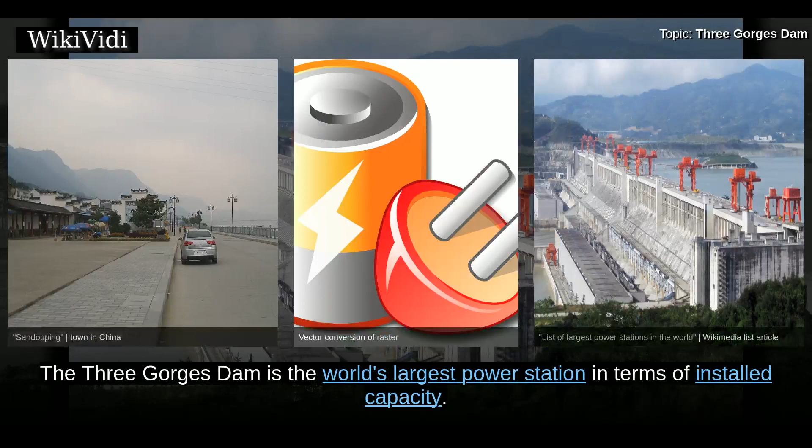Three Gorges Dam. The Three Gorges Dam is a hydroelectric gravity dam that spans the Yangtze River by the town of Sandouping, located in Yiling District, Yichang, Hubei Province, China. The Three Gorges Dam is the world's largest power station in terms of installed capacity.

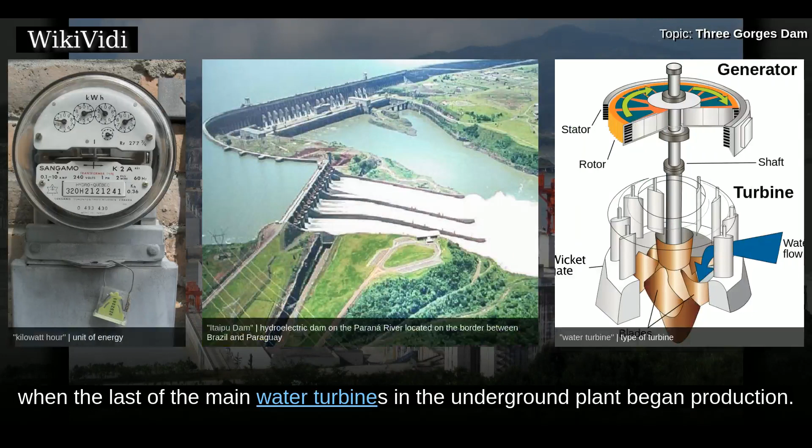In 2014, the dam generated 98.8 terawatt-hours and had the world record, but was surpassed by Itaipú Dam that set the new world record in 2016, producing 103.1 terawatt-hours. Except for the locks, the dam project was completed and fully functional as of July 4, 2012, when the last of the main water turbines in the underground plant began production. The ship lift was complete in December 2015.

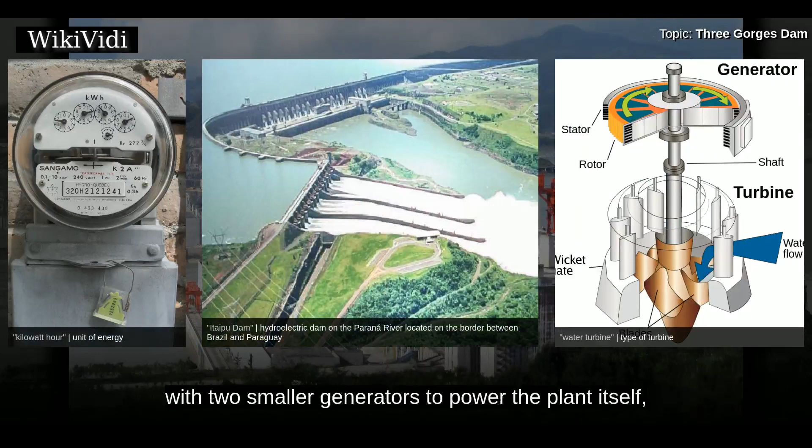Each main water turbine has a capacity of 700 megawatts. The dam body was completed in 2006, coupling the dam's 32 main turbines with two smaller generators to power the plant itself. The total electric generating capacity of the dam is 22,500 megawatts.

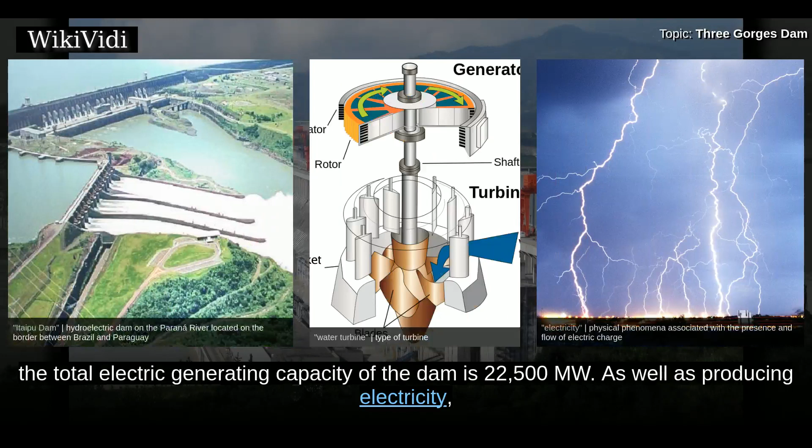As well as producing electricity, the dam is intended to increase the Yangtze River's shipping capacity and reduce the potential for floods downstream by providing flood storage space. China regards the project as monumental as well as a success socially and economically, with the design of state-of-the-art large turbines, and a move toward limiting greenhouse gas emissions.

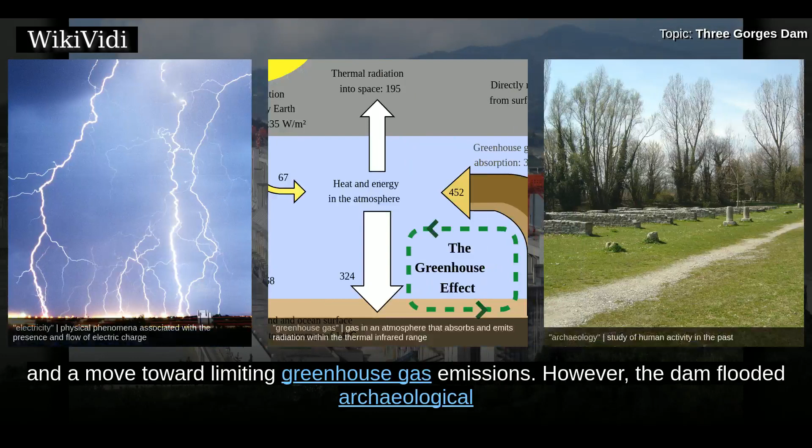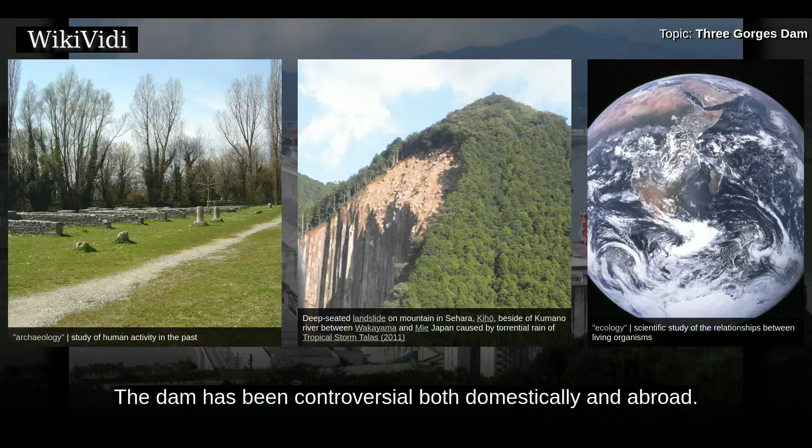However, the dam flooded archaeological and cultural sites and displaced some 1.3 million people, and is causing significant ecological changes, including an increased risk of landslides. The dam has been controversial both domestically and abroad.

History. A large dam across the Yangtze River was originally envisioned by Sun Yat-sen in the International Development of China in 1919. He stated that a dam capable of generating 30 million horsepower was possible downstream of the Three Gorges. In 1932, the nationalist government led by Chiang Kai-shek began preliminary work on plans in the Three Gorges. In 1939, Japanese military forces occupied Yichang and surveyed the area. A design, the Otani Plan, was completed for the dam in anticipation of a Japanese victory over China.

In 1944, the United States Bureau of Reclamation chief design engineer John L. Savage surveyed the area and drew up a dam proposal for the Yangtze River project. Some 54 Chinese engineers went to the U.S. for training. The original plans called for the dam to employ a unique method for moving ships. The ships would move into locks located at the lower and upper ends of the dam, and then cranes with cables would move the ships from one lock to the next. In the case of smaller watercraft, groups of craft would be lifted together for efficiency.

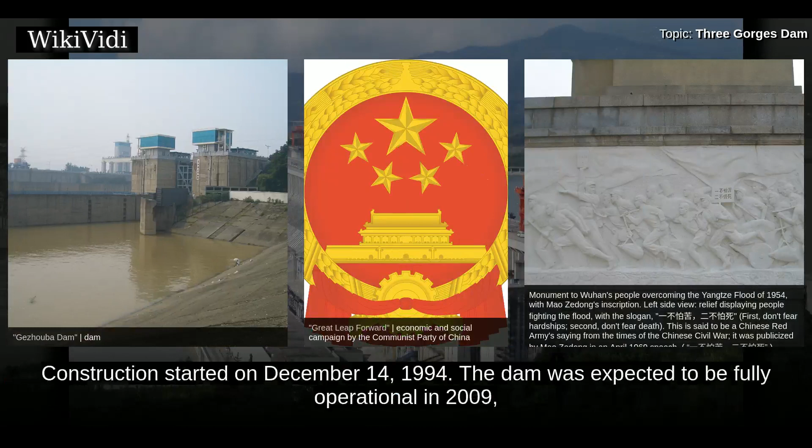The National People's Congress approved the dam in 1992. Out of 2,633 delegates, 1,767 voted in favor, 177 voted against, 664 abstained, and 25 members did not vote. Construction started on December 14, 1994. The dam was expected to be fully operational in 2009, but additional projects such as the underground power plant with 6 additional generators delayed full operation until May 2012. The shiplift was completed in 2015.

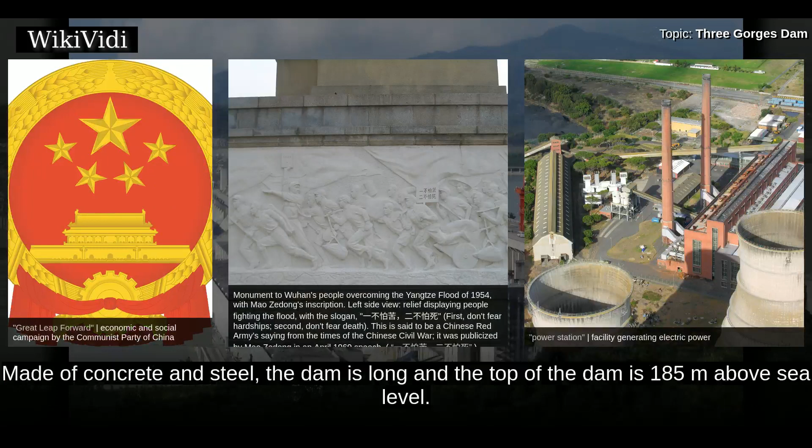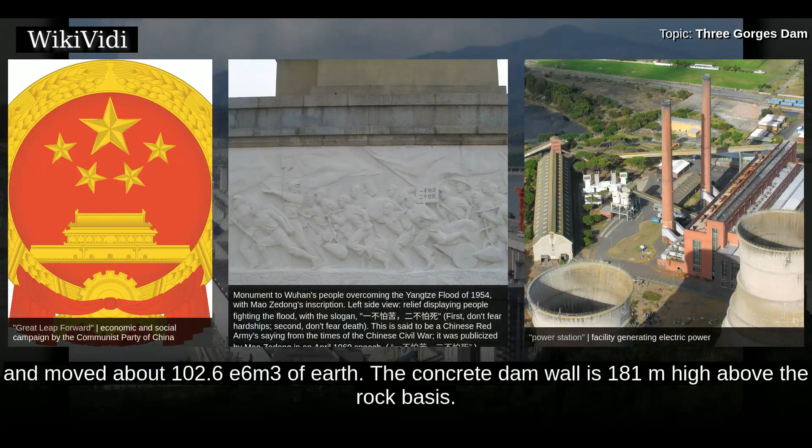The dam had raised the water level in the reservoir to above sea level by the end of 2008, and the designed maximum level by October 2010. Composition and dimensions. Made of concrete and steel, the dam is long and the top of the dam is 185 meters above sea level. The project used 27.2 million cubic meters of concrete, used 463,000 tonnes of steel, and moved about 102.6 million cubic meters of earth. The concrete dam wall is 181 meters high above the rock basis.

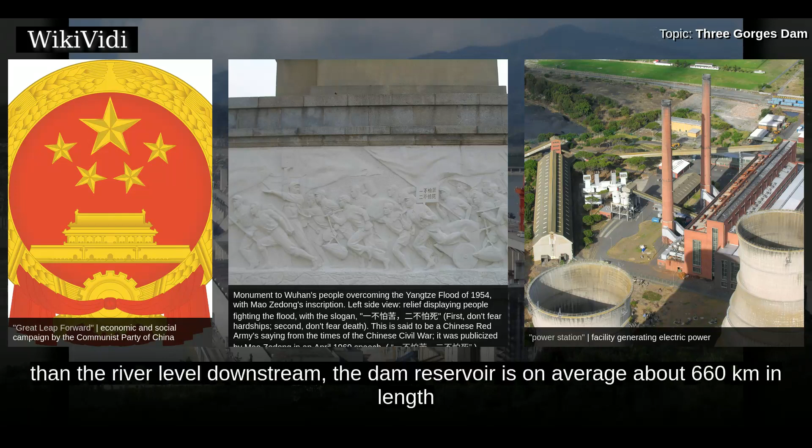When the water level is at its maximum of 175 meters above sea level, 110 meters higher than the river level downstream, the dam reservoir is on average about 660 kilometers in length and 1.12 kilometers in width. It contains 39.3 cubic kilometers of water and has a total surface area of 1,045 square kilometers. On completion, the reservoir flooded a total area of 632 square kilometers of land compared to the 1,350 square kilometers of reservoir created by the Itaipú Dam.

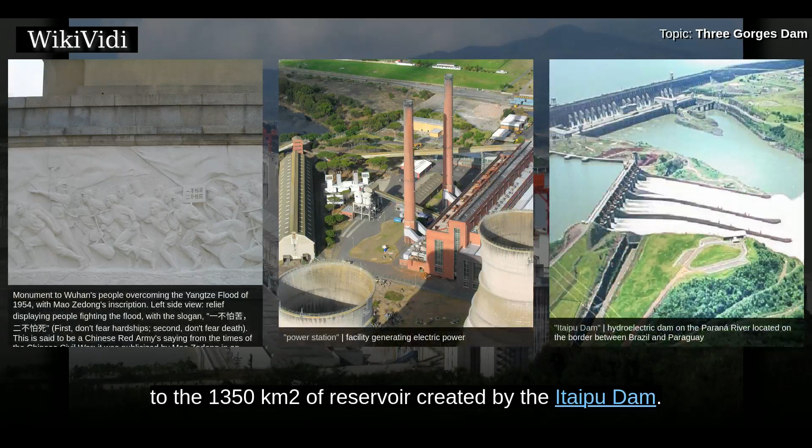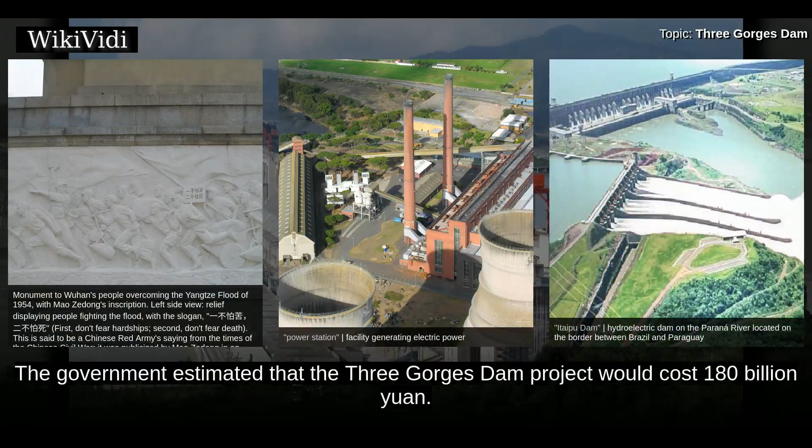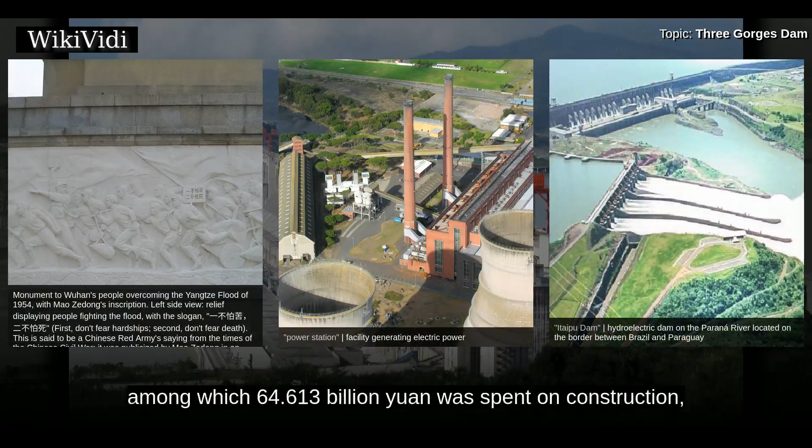Economics. The government estimated that the Three Gorges Dam project would cost 180 billion yuan. By the end of 2008, spending had reached 148.365 billion yuan, among which 64.613 billion yuan was spent on construction, 68.557 billion yuan on relocating affected residents, and 15.195 billion yuan on financing.

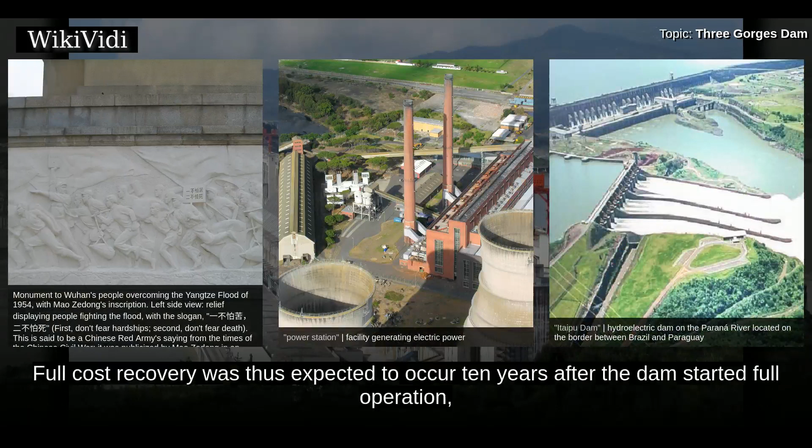It was estimated in 2009 that the construction cost would be recovered when the dam had generated 1,000 terawatt-hours of electricity, yielding 250 billion yuan. Full cost recovery was thus expected to occur 10 years after the dam started full operation. But the full cost of the Three Gorges Dam was recovered by December 20, 2013.

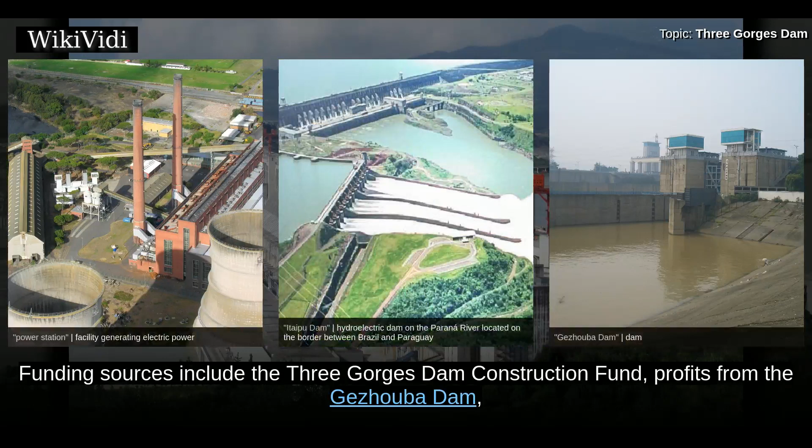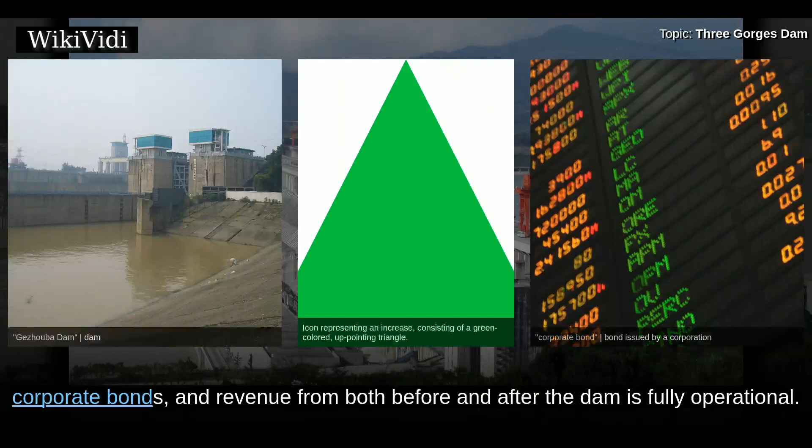Funding sources include the Three Gorges Dam Construction Fund, profits from the Gezhouba Dam, loans from the China Development Bank, loans from domestic and foreign commercial banks, corporate bonds, and revenue from both before and after the dam is fully operational. Additional charges were assessed as follows. Every province receiving power from the Three Gorges Dam had to pay 7 yuan per megawatt-hour extra. Other provinces had to pay an additional charge of 4 yuan per megawatt-hour. The Tibet Autonomous Region pays no surcharge.

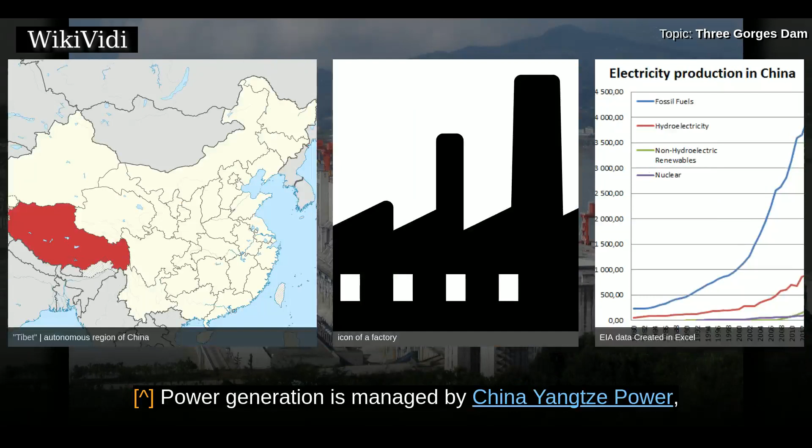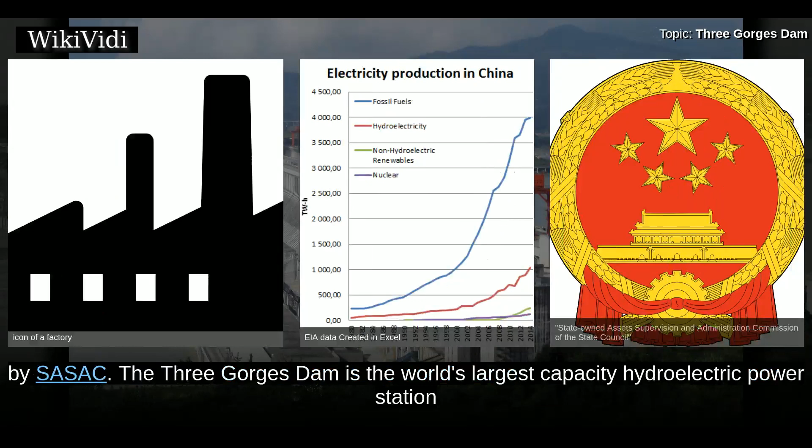Generating capacity. Power generation is managed by China Yangtze Power, a listed subsidiary of China Three Gorges Corporation, a central enterprise SOE administered by SASAC. The Three Gorges Dam is the world's largest capacity hydroelectric power station, with 34 generators, 32 main generators each with a capacity of 700 megawatts, and 2 plant power generators each with capacity of 50 megawatts,

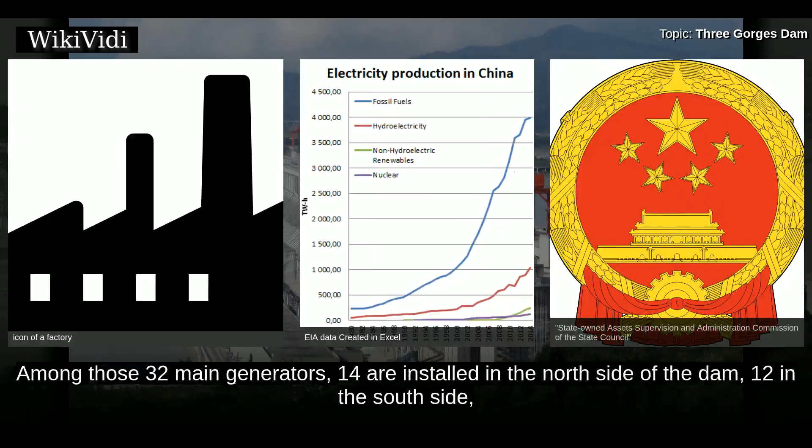making a total capacity of 22,500 megawatts. Among those 32 main generators, 14 are installed in the north side of the dam, 12 in the south side, and the remaining 6 in the underground power plant in the mountain south of the dam. The expected annual electricity generation will be over 100 terawatt-hours.

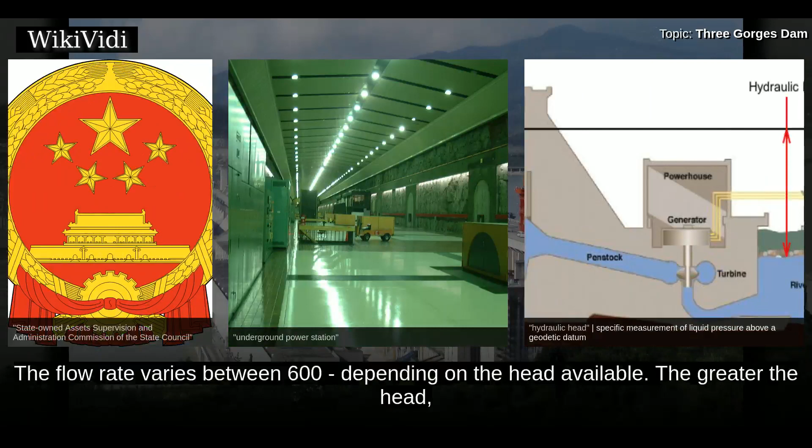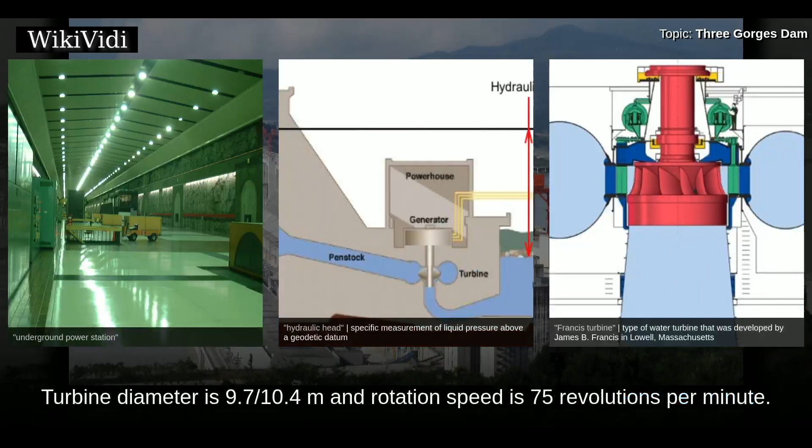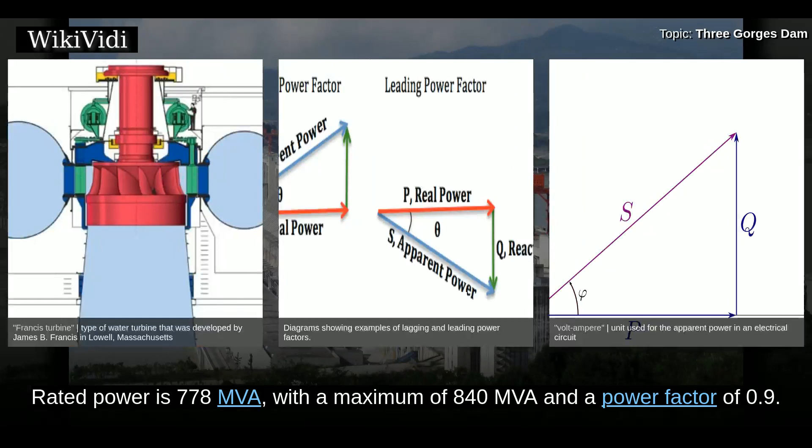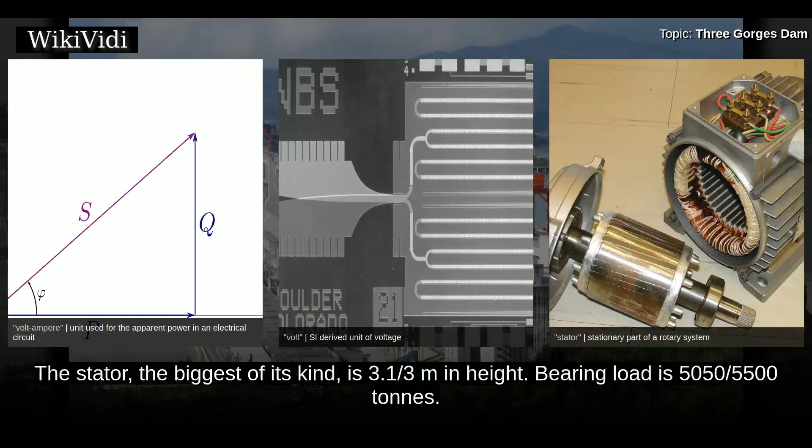Rated power is 778 MVA with a maximum of 840 MVA and a power factor of 0.9. The generator produces electrical power at 20 kV. The outer diameter of the generator stator is 21.4, 20.9 meters. The inner diameter is 18.5, 18.8 meters. The stator, the biggest of its kind, is 3.1, 3 meters in height. Bearing load is 5,050/5,500 tonnes. Average efficiency is over 94% and reaches

96.5%. The generators were manufactured by two joint ventures, one of them Alstom ABB Group and the Chinese company Harbin Motor, the other Voith General Electric Siemens and the Chinese company Oriental Motor. The technology transfer agreement was signed together with the contract. Most of the generators are water-cooled. Some newer ones are air-cooled, which are simpler in design and manufacture and are easier to maintain.

Generator installation progress. The 14 north side main generators are in operation. The first started on July 10, 2003. The north side became completely operational September 7, 2005, with the implementation of generator number 9. Full power was only reached on October 18, 2006 after the water level reached 156 meters. The 12 south side main generators are also in operation. Number 22 began operation on June 11, 2007, and number 15 started up on October 30, 2008.

The sixth began operation on December 18, 2007, raising capacity to 14.1 gigawatts, finally surpassing Itaipú, to become the world's largest hydropower plant by capacity. As of May 23, 2012, when the last main generator number 27 finished its final test, the 6 underground main generators are also in operation, raising capacity to 22.5 gigawatts. After 9 years of construction, installation and testing, the power plant is now fully operational.

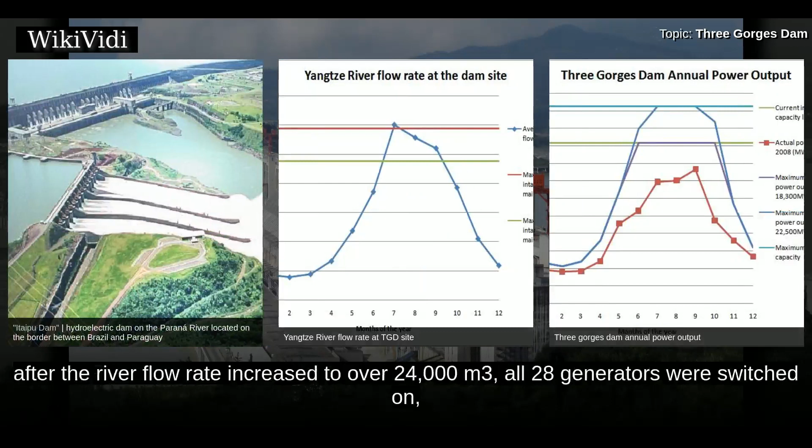Output milestones. By August 16, 2011, the plant had generated 500 terawatt-hours of electricity. In July 2008, it generated 10.3 terawatt-hours of electricity, its first month over 10 terawatt-hours. On June 30, 2009, after the river flow rate increased to over 24,000 cubic meters, all 28 generators were switched on, producing only 16,100 megawatts because the head available during flood season is insufficient.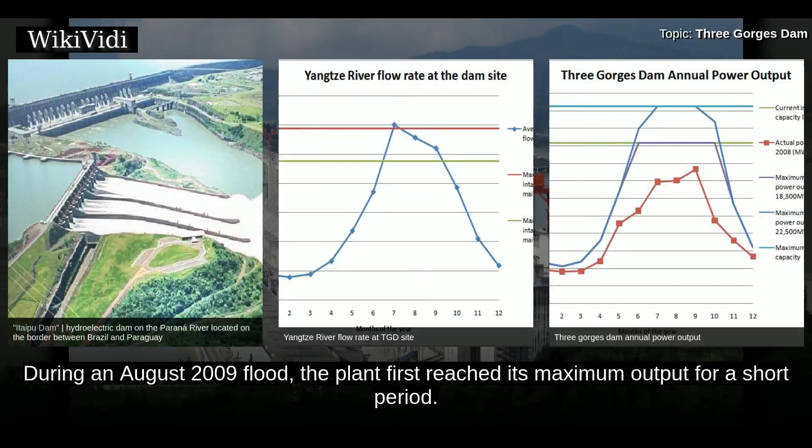During an August 2009 flood, the plant first reached its maximum output for a short period. During the November to May dry season, power output is limited by the river's flow rate, as seen in the diagrams on the right. When there is enough flow, power output is limited by plant generating capacity. The maximum power output curves were calculated based on the average flow rate at the dam site, assuming the water level is 175 meters and the plant gross efficiency is 90.15%. The actual power output in 2008 was obtained based on the monthly electricity sent to the grid.

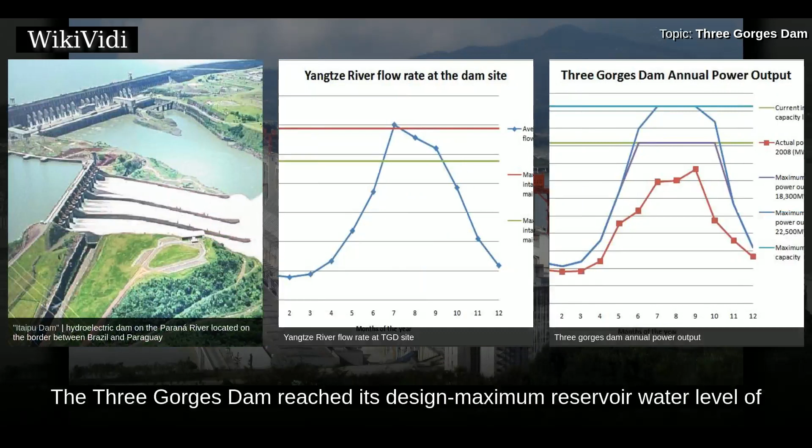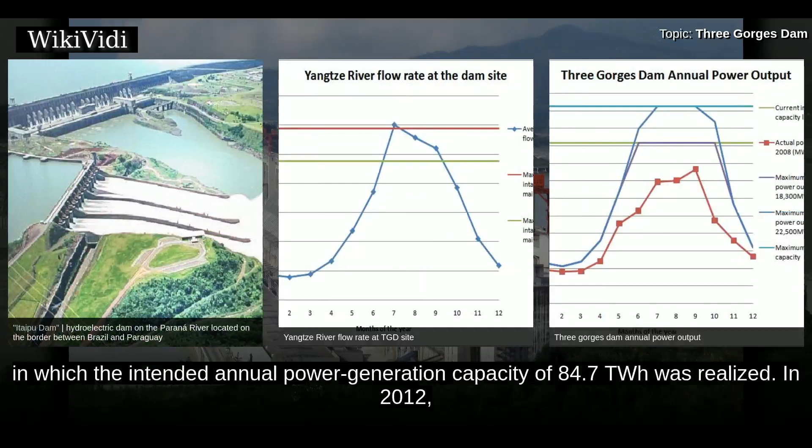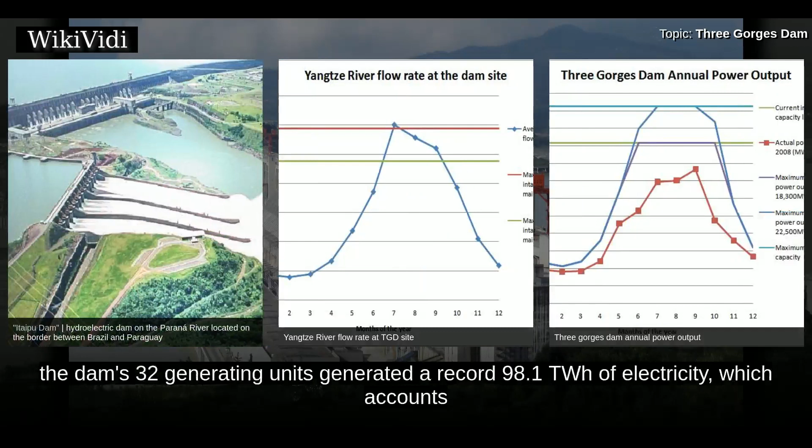The Three Gorges Dam reached its design maximum reservoir water level for the first time on October 26, 2010, in which the intended annual power generation capacity of 84.7 terawatt-hours was realized. In 2012, the dam's 32 generating units generated a record 98.1 terawatt-hours of electricity, which accounts for 14% of China's total hydro generation.

Distribution. The State Grid Corporation and China Southern Power Grid paid a flat rate of 250 yuan per megawatt-hour until July 2, 2008. Since then, the price has varied by province from 228.7 to 401.8 yuan per megawatt-hour. Higher-paying customers, such as Shanghai, receive priority. 9 provinces and 2 cities consume power from the dam. Power distribution and transmission infrastructure cost about 34.387 billion yuan. Construction was completed in December 2007, 1 year ahead of schedule.

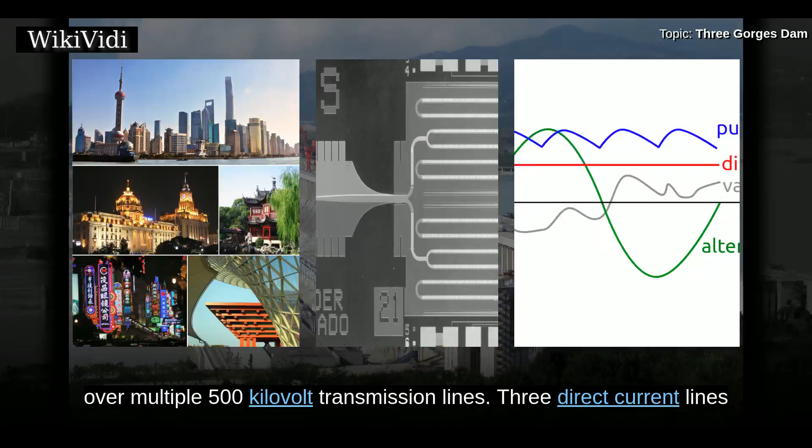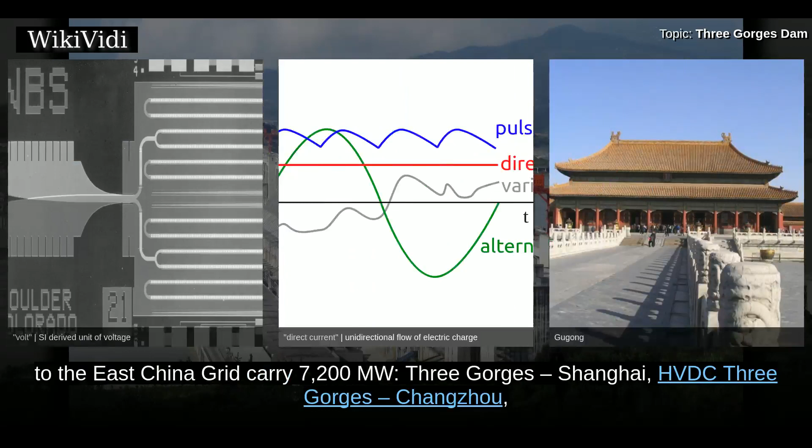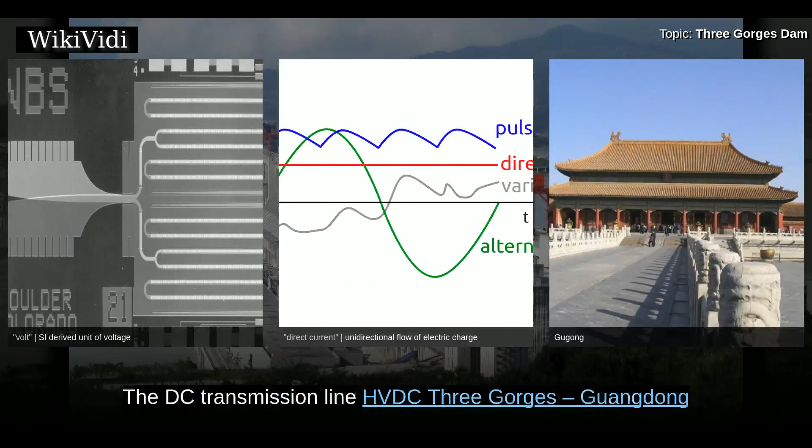Power is distributed over multiple 500 kV transmission lines. 3 direct current lines to the East China grid carry 7,200 megawatts: HVDC Three Gorges Shanghai, HVDC Three Gorges Changzhou, and HVDC Gezhouba Shanghai. The alternating current lines to the central China grid have a total capacity of 12,000 megawatts. The DC transmission line HVDC Three Gorges Guangdong to the South China grid has a capacity of 3,000 megawatts.

The dam was expected to provide 10% of China's power. However, electricity demand has increased more quickly than previously projected. Even fully operational, on average it supports only about 1.7% of electricity demand in China in the year of 2011, when the Chinese electricity demand reached 4,692.8 terawatt-hours.

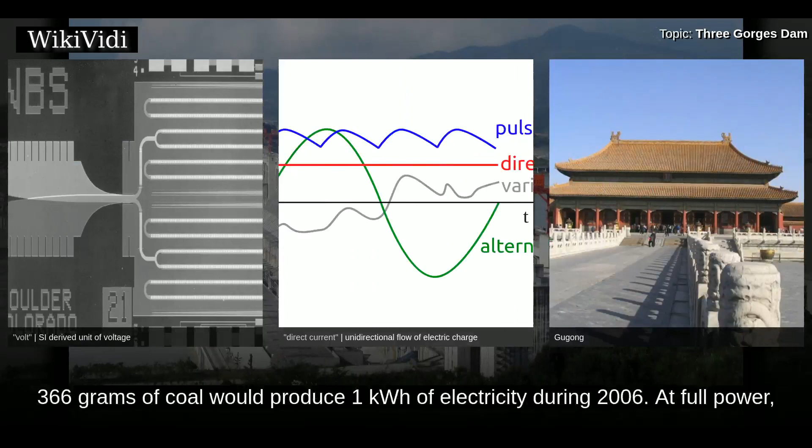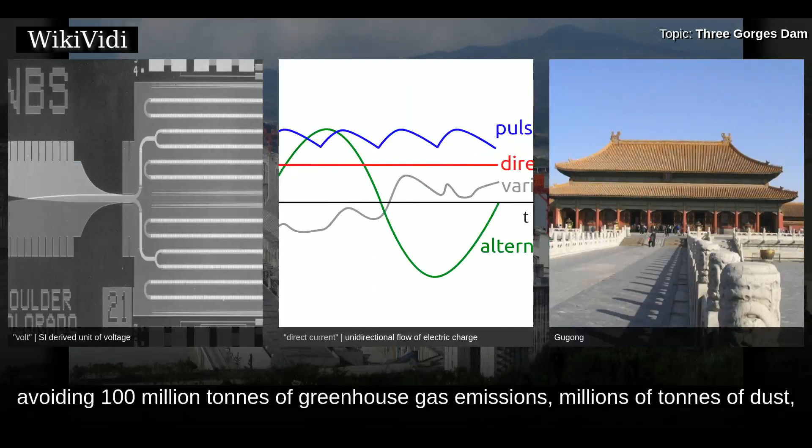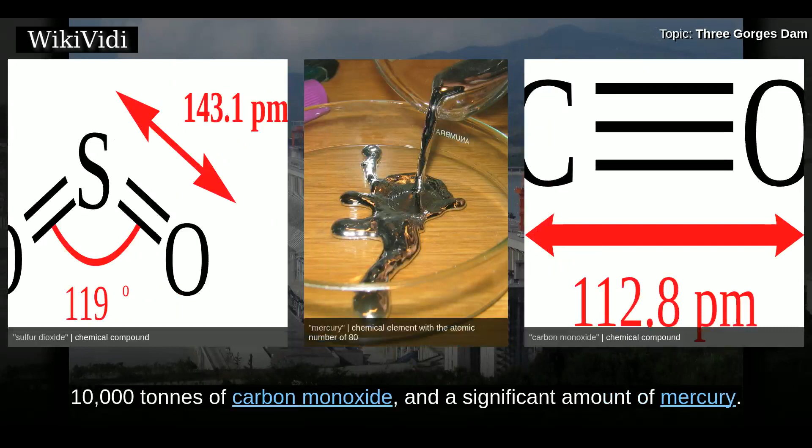Emissions. According to the National Development and Reform Commission of China, 366 grams of coal would produce 1 kilowatt-hour of electricity during 2006. At full power, Three Gorges reduces coal consumption by 31 million tons per year, avoiding 100 million tons of greenhouse gas emissions, millions of tons of dust, 1 million tons of sulfur dioxide, 370,000 tons of nitric oxide, 10,000 tons of carbon monoxide, and a significant amount of mercury. Hydropower saves the energy needed to mine, wash and transport the coal from northern China.

From 2003 to 2007, power production equaled that of 84 million tons of standard coal, reducing carbon dioxide by 190 million tons, sulfur dioxide by 2.29 million tons, and nitrogen oxides by 980,000 tons. The dam increased the Yangtze's barge capacity 6-fold, reducing carbon dioxide emission by 630,000 tons. From 2004 to 2007, a total of 198 million tons of goods passed through the ship locks. Compared to using trucking, barges reduced carbon dioxide emission by 10 million tons and lowered costs by 25%.

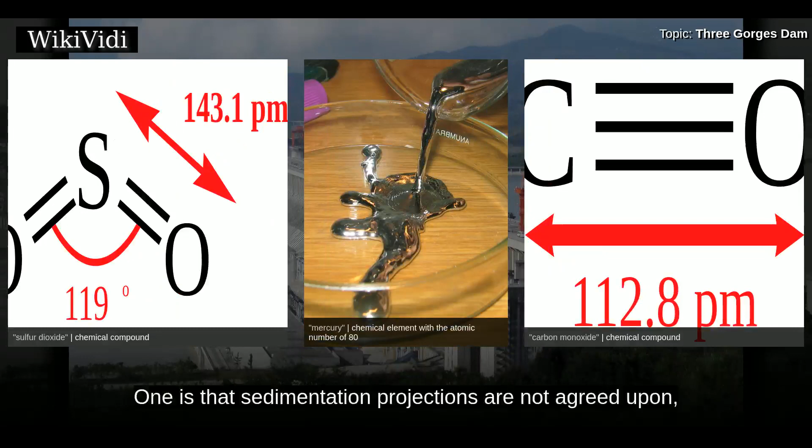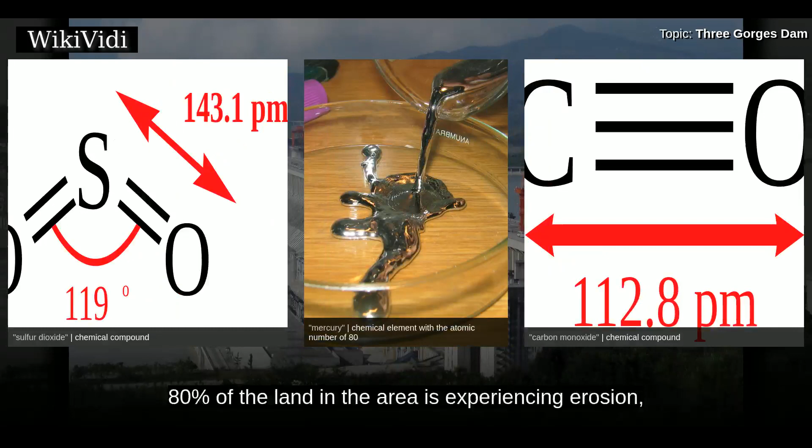Erosion and sedimentation. 2 hazards are uniquely identified with the dam. One is that sedimentation projections are not agreed upon, and the other is that the dam sits on a seismic fault. At current levels, 80% of the land in the area is experiencing erosion, depositing about 40 million tons of sediment into the Yangtze annually. Because the flow is slower above the dam, much of this sediment will now settle there instead of flowing downstream, and there will be less sediment downstream.

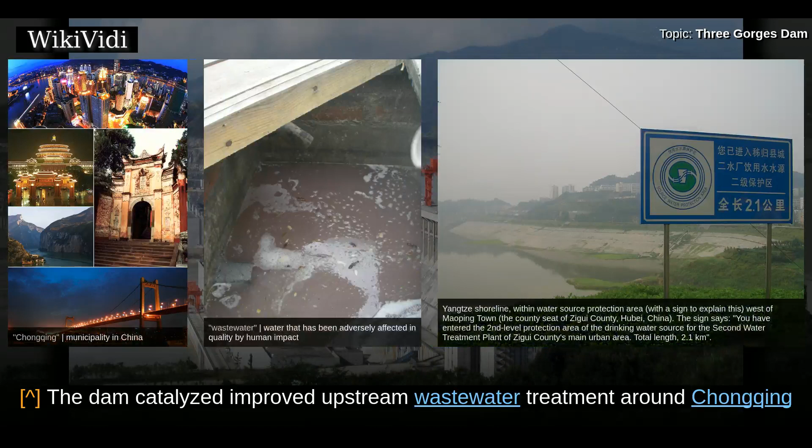Waste management. The dam catalyzed improved upstream wastewater treatment around Chongqing and its suburban areas, according to the Ministry of Environmental Protection. As of April 2007, more than 50 new plants could treat 1.84 million tons per day.

65% of the total need. About 32 landfills were added, which could handle 7,664.5 tons of solid waste every day.

Over 1 billion tons of wastewater are released annually into the river, which was more likely to be swept away before the reservoir was created. This has left the water looking stagnant, polluted and murky.

Forest cover. In 1997, the Three Gorges area had 10% forestation, down from 20% in the 1950s. Research by the United Nations Food and Agriculture Organization suggested that the Asia-Pacific region would overall gain about 6,000 square kilometers of forest by 2008. That is a significant change from the 13,000 square kilometers net loss of forest each year in the 1990s.

The main reason is China's huge reforestation effort. This accelerated after the 1998 Yangtze River floods convinced the government that it must restore tree cover, especially in the Yangtze basin upstream of the Three Gorges Dam.

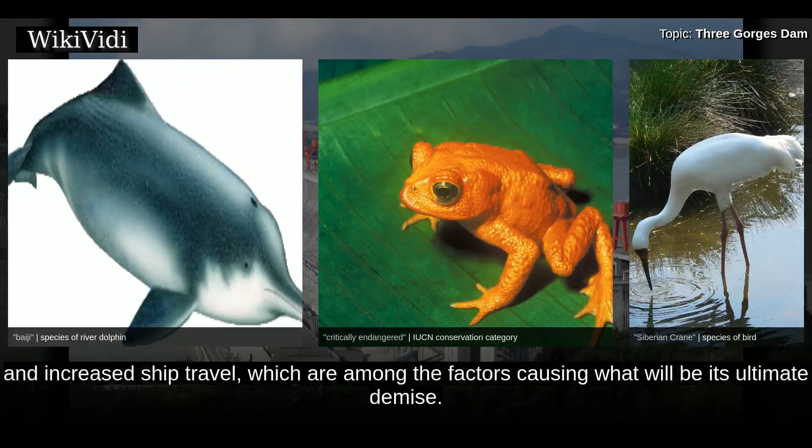Of the 3,000 to 4,000 remaining critically endangered Siberian cranes, a large number currently spend the winter in wetlands that will be destroyed by the Three Gorges Dam. The dam contributed to the functional extinction of the baiji Yangtze River dolphin. Though it was close to this level even at the start of construction, the dam further decreased its habitat and increased ship travel, which are among the factors causing its ultimate demise. In addition, populations of the Yangtze sturgeon are guaranteed to be negatively affected by the dam.

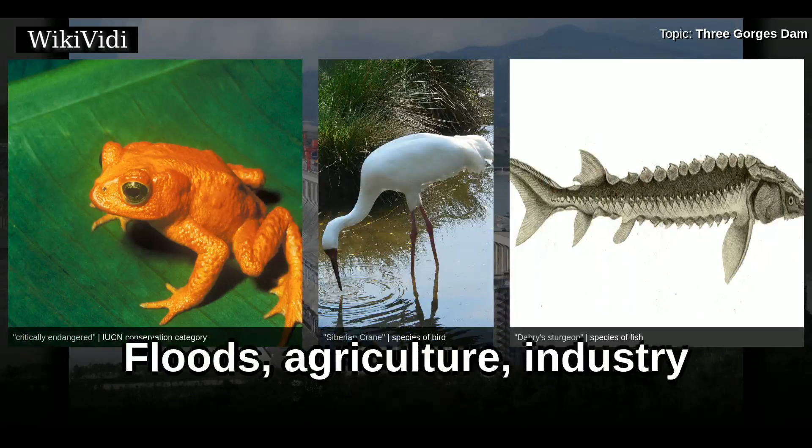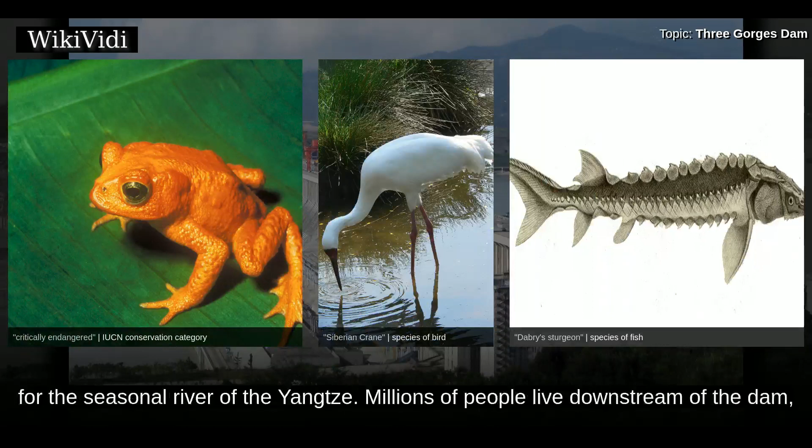Floods. Agriculture industry. An important function of the dam is to control flooding, which is a major problem for the seasonal river of the Yangtze. Millions of people live downstream of the dam, with many large important cities like Wuhan, Nanjing and Shanghai situated adjacent to the river. Plenty of farmland and China's most important industrial area are built beside the river. The reservoir's flood storage capacity is 22 cubic kilometers. This capacity will reduce the frequency of major downstream flooding from once every 10 years to once every 100 years. The dam is expected to minimize the effect of even a superflood.

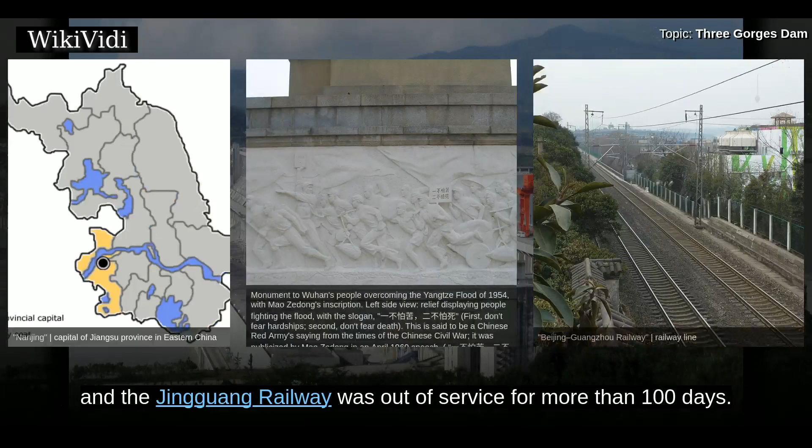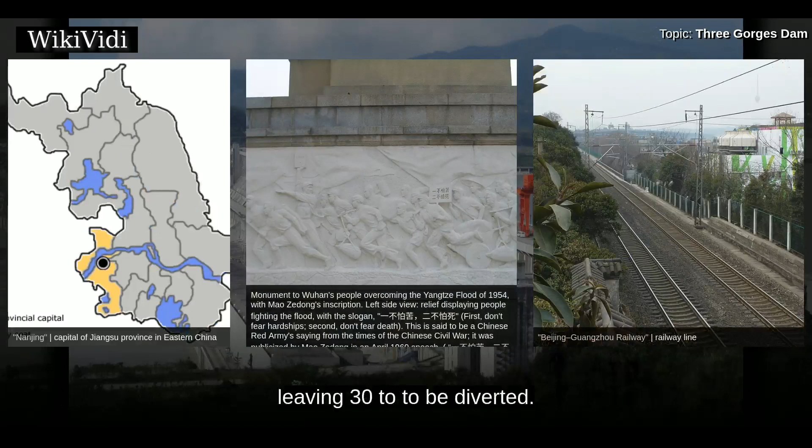Also, the dam cannot protect against some of the large tributaries downstream, including the Xiang, Zishui, Yuanshui, Lishui, Hanshui and the Gan. In 1998, a flood in the same area caused billions of dollars in damage. 2,039 square kilometers of farmland were flooded. The flood affected more than 2.3 million people, killing 1,526.

In early August 2009, the largest flood in 5 years passed through the dam site. The dam limited the water flow to less than 40,000 cubic meters per second, raising the upstream water level from 145.13 meters on August 1, 2009 to 152.88 on August 8, 2009.

4.27 cubic kilometers of flood water were captured, and the river flow was cut by as much as 15,000 cubic meters per second. The dam discharges its reservoir during the dry season between December and March every year. This increases the flow rate of the river downstream and provides fresh water for agricultural and industrial usage. It also improves shipping conditions.

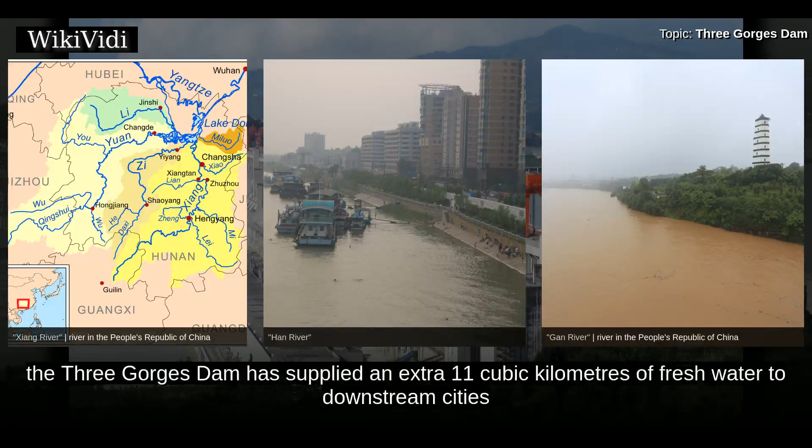The water level upstream drops from 175 meters to 145 meters, preparing for the rainy season. The water also powers the Gezhouba Dam downstream. Since the filling of the reservoir in 2003, the Three Gorges Dam has supplied an extra 11 cubic kilometers of fresh water to downstream cities and farms during the dry season.

Terrestrial impact. In 2010, NASA scientists calculated that the shift of water mass stored by the dams would increase the length of the Earth's day by 0.06 microseconds and make the Earth slightly more round in the middle and flat on the poles.

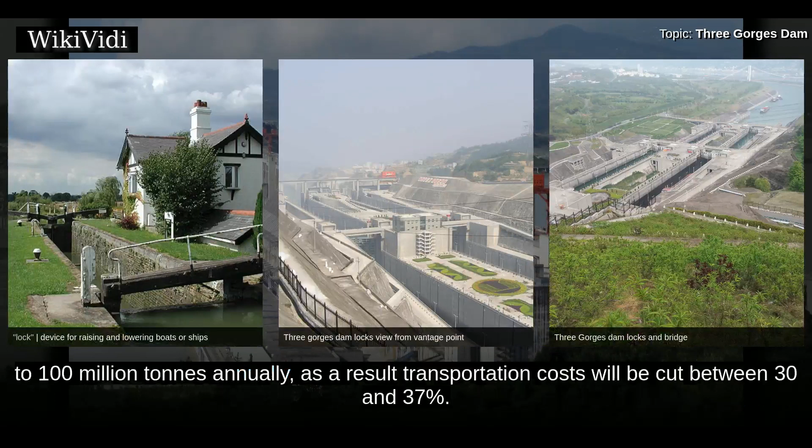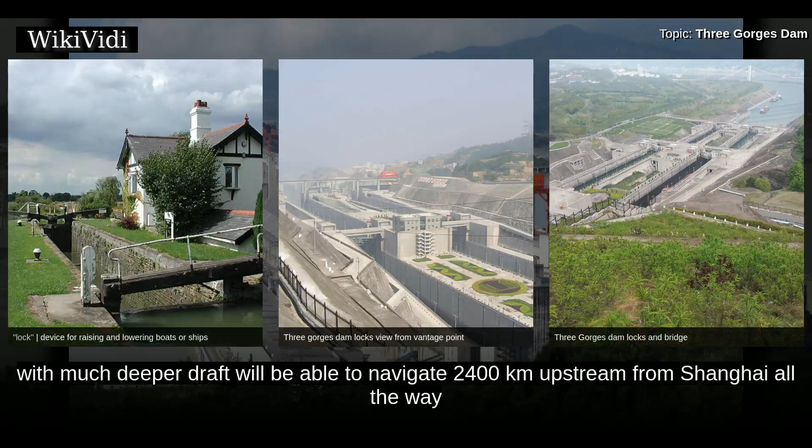Locks. The installation of ship locks is intended to increase river shipping from 10 million to 100 million tons annually. As a result, transportation costs will be cut between 30 and 37%. Shipping will become safer since the gorges are notoriously dangerous to navigate. Ships with much deeper draft will be able to navigate 2,400 kilometers upstream from Shanghai all the way to Chongqing. It is expected that shipping to Chongqing will increase 5-fold.

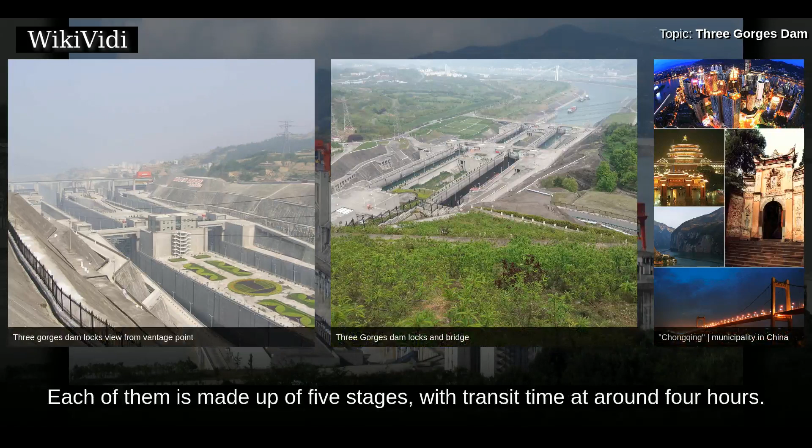There are 2 series of ship locks installed near the dam. Each of them is made up of 5 stages with transit time at around 4 hours. Maximum vessel size is 10,000 tons. The locks are 282 meters long, 35 meters wide and 5 meters deep. That is 30 meters longer than those on the St. Lawrence Seaway, but half as deep.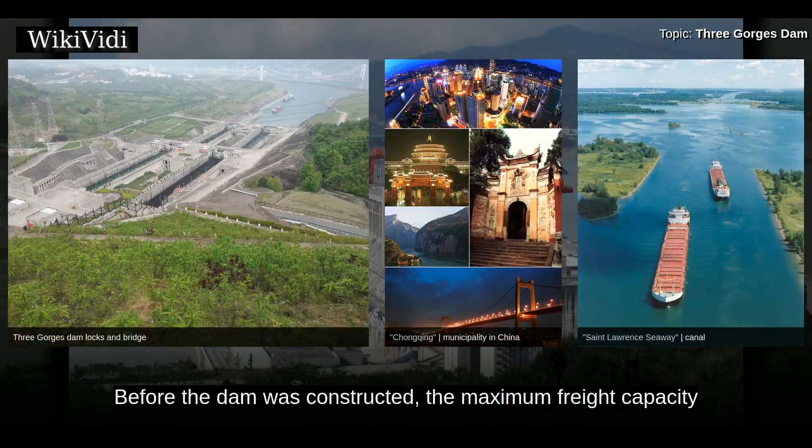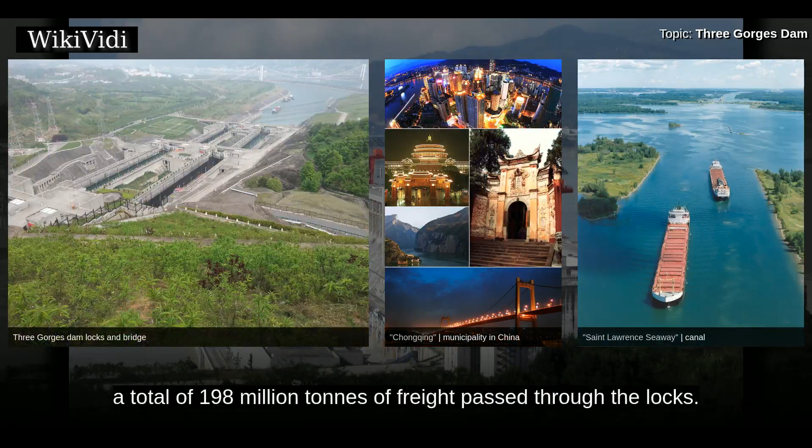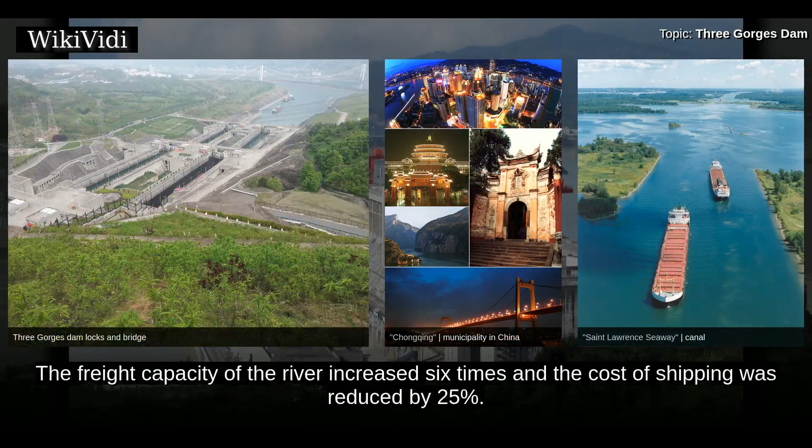Before the dam was constructed, the maximum freight capacity at the Three Gorges site was 18.0 million tons per year. From 2004 to 2007, a total of 198 million tons of freight passed through the locks. The freight capacity of the river increased 6 times and the cost of shipping was reduced by 25%. The total capacity of the ship locks is expected to reach 100 million tons per year.

These locks are staircase locks whereby inner lock gate pairs serve as both the upper gate and lower gate. The gates are the vulnerable hinged type which, if damaged, could temporarily render the entire flight unusable. As there are separate sets of locks for upstream and downstream traffic, this system is more water efficient than bidirectional staircase locks.

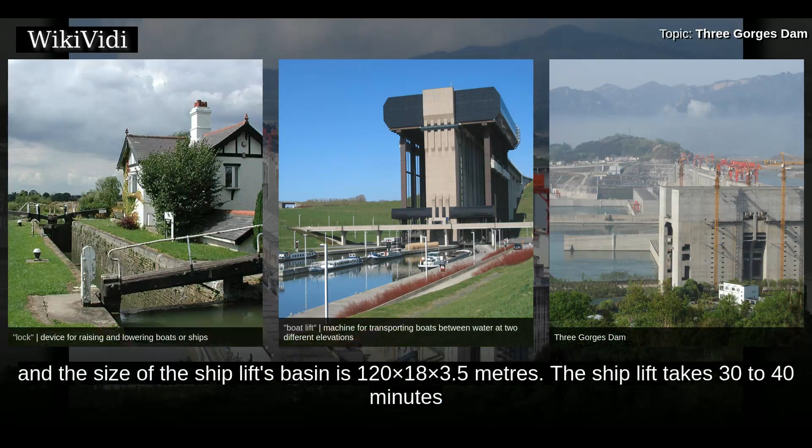Ship lift. In addition to the canal locks, there is a ship lift, a kind of elevator for vessels. The ship lift could lift ships of up to 3,000 tons. The vertical distance traveled is 113 meters, and the size of the ship lift's basin is 120 times 18 times 3.5 meters. The ship lift takes 30 to 40 minutes to transit as opposed to the 3 to 4 hours for stepping through the locks.

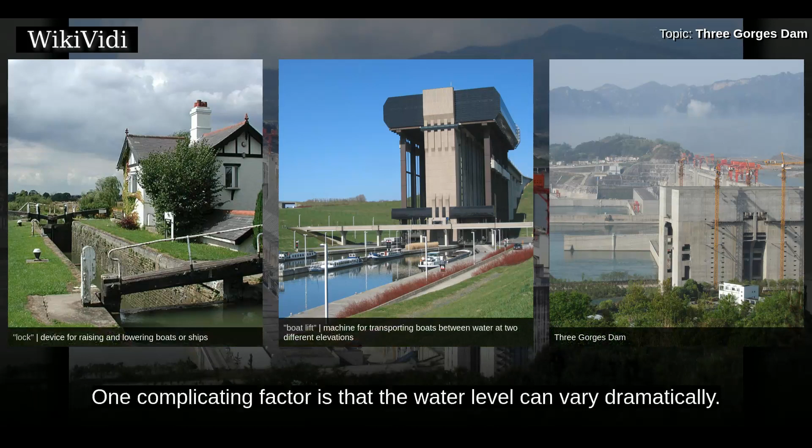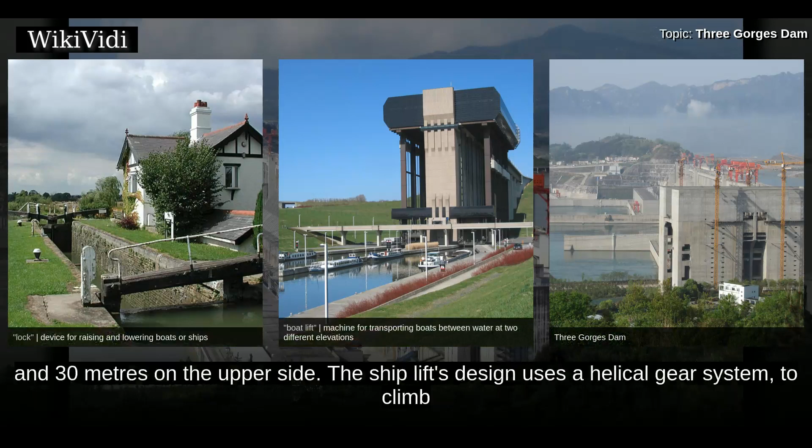One complicating factor is that the water level can vary dramatically. The ship lift must work even if water levels vary by 12 meters on the lower side and 30 meters on the upper side. The ship lift's design uses a helical gear system to climb or descend a tooth rack. The ship lift was not yet complete when the rest of the project was officially opened on May 20, 2006.

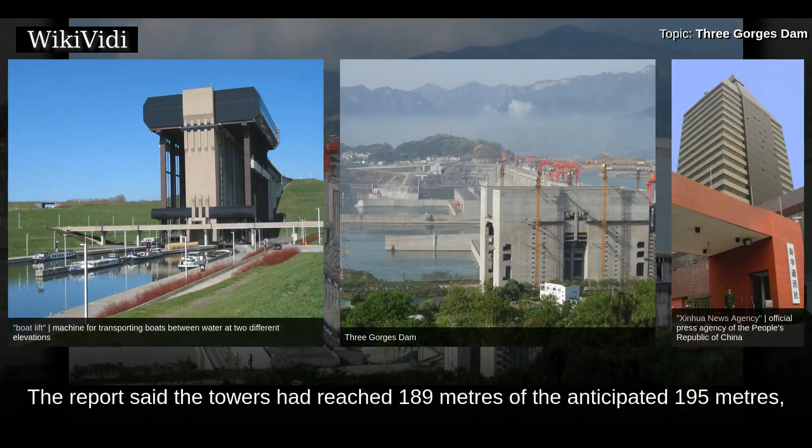In November 2007, it was reported in the local media that construction of the ship lift started in October 2007. In February 2012, Xinhua reported that the 4 towers that are to support the ship lift had almost been completed. The report said the towers had reached 189 meters of the anticipated 195 meters. The towers would be completed by June 2012 and the entire ship lift in 2015.

As of May 2014, the ship lift was expected to be completed by July 2015. It was tested in December 2015 and announced complete in January 2016. Lahmeyer, the German firm that designed the ship lift, said it will take a vessel less than an hour to transit the lift. An article in Steel Construction says the actual time of the lift will be 21 minutes. It says that the expected dimensions of the 3,000 ton passenger vessels the ship lift's basin was designed to carry will be 84.5 meters by 17.2 meters by 2.65 meters.

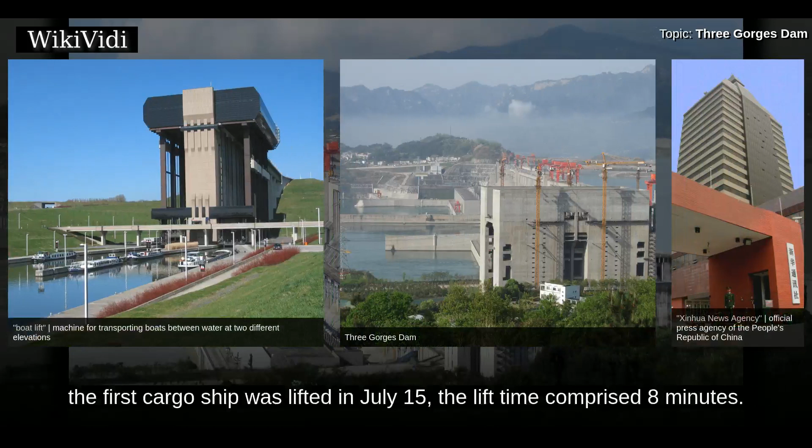The trials of the elevator finished in July 2016. The first cargo ship was lifted on July 15. The lift time comprised 8 minutes. Shanghai Daily reported that the first operational use of the lift was on September 18, 2016, when limited operational testing of the lift began.

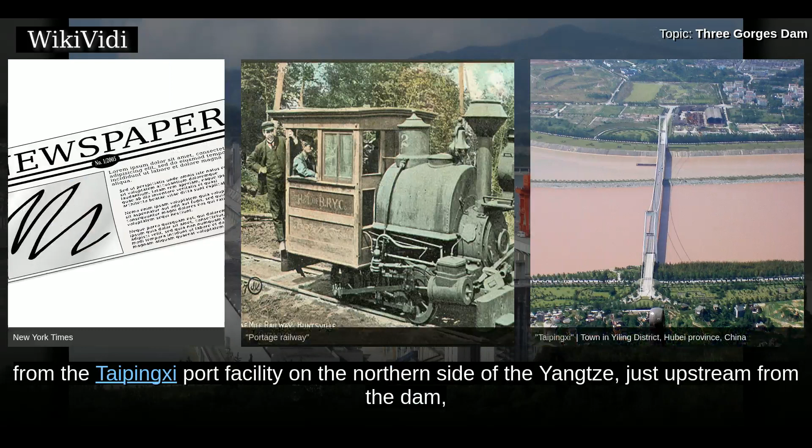Portage railways. Plans also exist for the construction of short portage railways bypassing the dam area altogether. Two short rail lines, one on each side of the river, are to be constructed. The 88-kilometer-long Northern Portage Railway will run from the Taipingxi port facility on the northern side of the Yangtze just upstream from the dam, via Yichang East Railway Station to the Baiyang Tianjiahe port facility in Baiyang Town. Below Yichang, the 95-kilometer-long Southern Portage Railway will run from Maoping via Yichang South Railway Station to Zhicheng. In late 2012, preliminary work started along both future railway routes.

Relocation of residents. The great size of the reservoir and the huge relocation it caused was justified by the flood protection it provides for communities downstream. As of June 2008, China relocated 1.24 million residents as 13 cities, 140 towns and 1,350 villages either flooded or were partially flooded by the reservoir. About 1.5% of the province's 60.3 million and Chongqing municipality's 31.44 million population. About 140,000 residents were relocated to other provinces. Relocation was completed on July 22, 2008.

Some 2007 reports claimed that Chongqing municipality will encourage an additional 4 million people to move away from the dam to the main urban area of Chongqing by 2020. However, the municipal government explained that the relocation is due to urbanization rather than the dam, and people involved included other areas of the municipality. Allegedly, funds for relocating 13,000 farmers around Gaoyang disappeared after being sent to the local government, leaving residents without compensation.

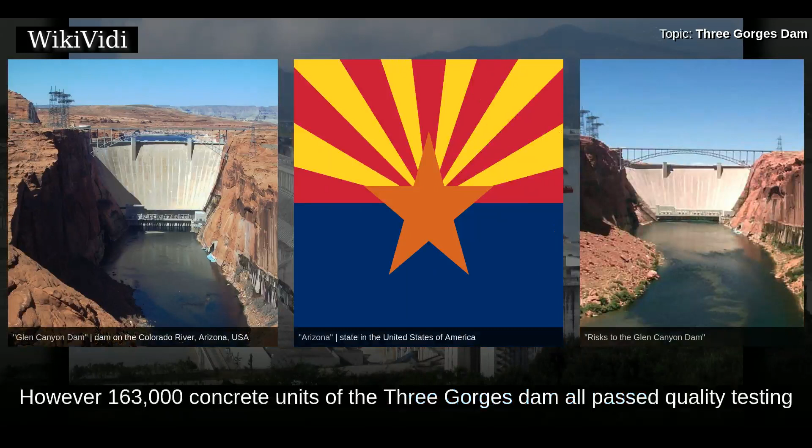Structural integrity. Days after the first filling of the reservoir, around 80 hairline cracks were observed in the dam's structure. The submerged spillway gates of the dam might pose a risk of cavitation similar to that which severely damaged the poorly designed and cavitating spillways of the Glen Canyon Dam in the U.S. state of Arizona, which was unable to properly withstand the Colorado River floods of 1983. However, 163,000 concrete units of the Three Gorges Dam all passed quality testing, and the deformation was within design limits. An experts group gave the project overall a good quality rating.

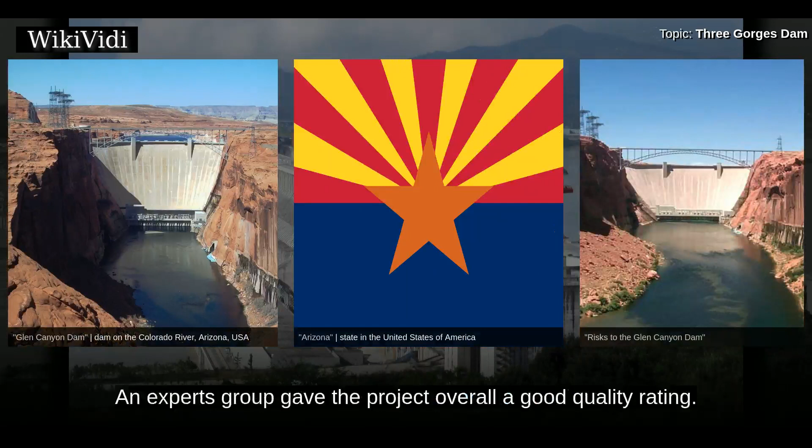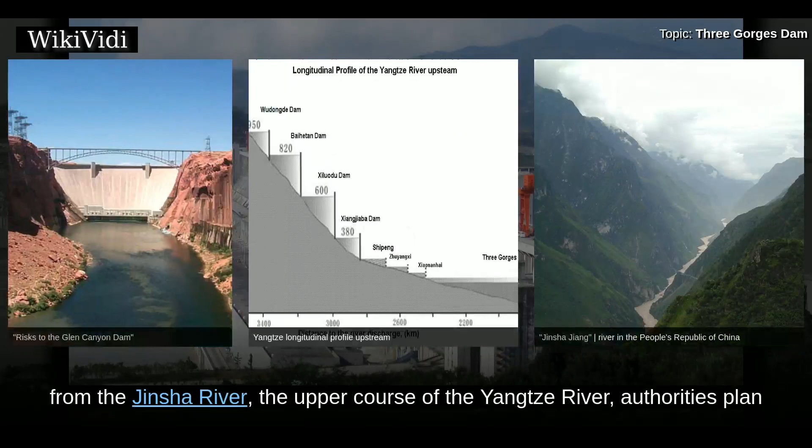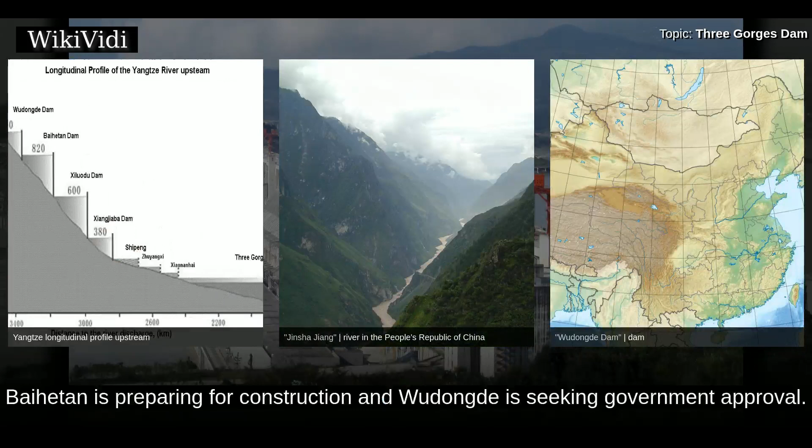Upstream dams. In order to maximize the utility of the Three Gorges Dam and cut down on sedimentation from the Jinsha River, the upper course of the Yangtze River, authorities plan to build a series of dams on the Jinsha, including Wudongde Dam, Baihetan Dam, along with the now completed Xiluodu and Xiangjiaba dams. The total capacity of those four dams is 38,500 megawatts, almost double the capacity of the Three Gorges. Baihetan is preparing for construction and Wudongde is seeking government approval. Another 8 dams are in the midstream of the Jinsha and 8 more upstream of it.